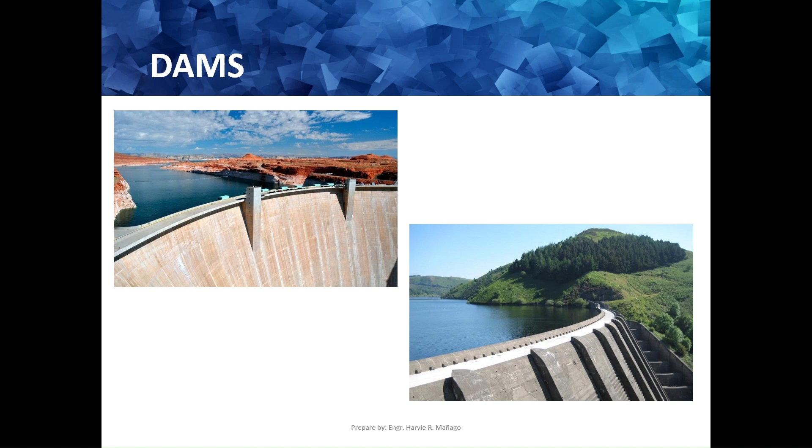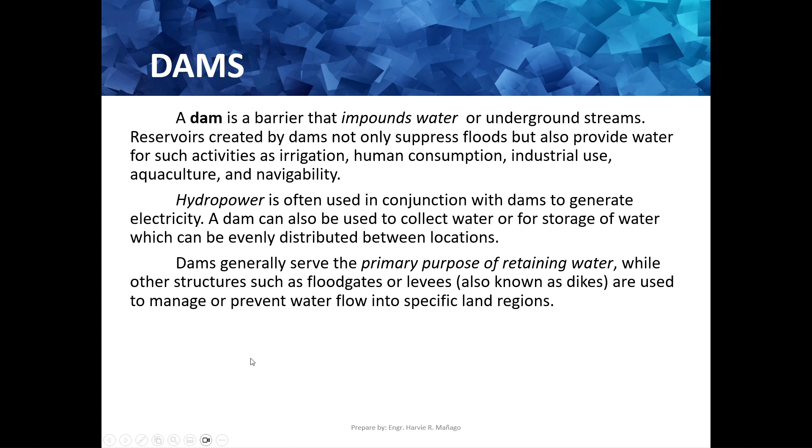Our next discussion is the application of hydrostatic forces on dams. We'll still be applying what we learned about hydrostatic forces on both plane and curved surfaces to dams. So basically, what is a dam? A dam is a barrier that impounds water or underground streams. Reservoirs created by dams not only suppress floods but also provide water for activities such as irrigation, human consumption, industrial use, etc. Sometimes hydropower plants are incorporated into dams to utilize this function. But basically, the general purpose of a dam is to retain water.

Hydrostatic forces acting on a dam can cause certain types of failure. One is that the dam may slide horizontally along its base, meaning it gets displaced horizontally. Or it's possible that it may overturn, meaning it tips over or tumbles along its toe.

So what is this 'toe' that was mentioned? We'll show this later in the sample problem. Another consideration is hydrostatic uplift along the bottom of the dam, caused by water seeping under the dam. Since the dam is submerged, like any other object underneath the surface of water, it has a buoyant force, so we get an uplift force along the bottom of the dam. That's another thing to consider.

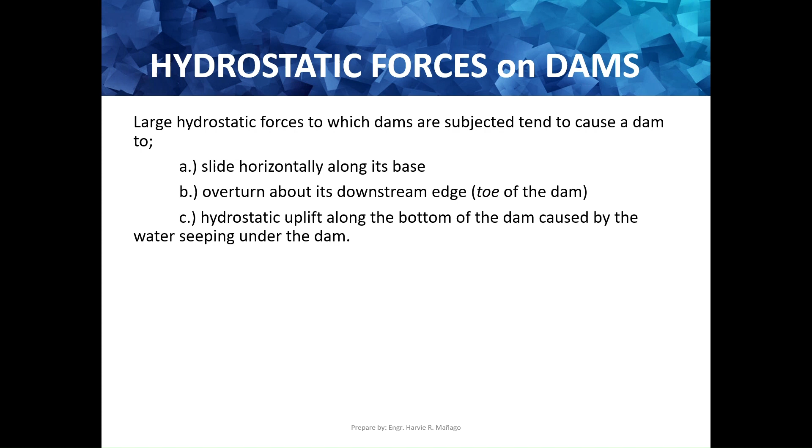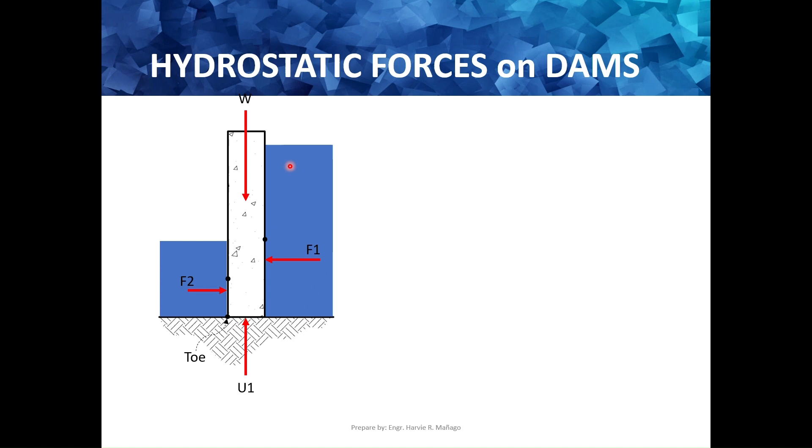Later we'll have a sample problem so this is better understood. Here are the formulas we need to consider. The factor of safety, Fs, for overturning is calculated as the total righting moment divided by the total overturning moment, and this should be greater than 1. That makes sense, because the righting moment, or the moment that prevents the dam from overturning, should be greater compared to the total overturning moment, or the moment that causes your dam to overturn.

So, sa sample problem, papakita natin kung paano yan.

Another formula naman is the factor of safety for sliding. Take note, Fs yan yung factor of safety. So the factor of safety for sliding, ito naman yung formula: sliding resistance divided by the sliding force. Mapapansin niyo, kamukha lang ito nung sa MECDEF ninyo, yung topic ng friction. So basically ito yung friction force mu ry divided by the sliding force rx.

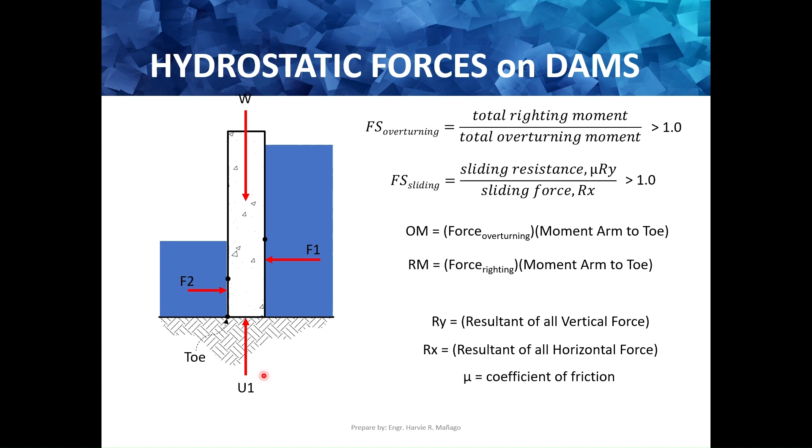Okay, so set natin itong figure na to para mas makita natin yung mga possible forces na mag-aact on your dam. Dito simple lang, rectangular lang siya, straight lang, okay? Tapos may hydrostatic force ka lang dito, and then you have the weight, and then yung uplift force. What if ganito na yung itsura ng dam mo? The easiest way is gawin natin siya by parts. Hati-hatiin muna natin, para kapag kumukuha tayo ng volume, kumukuha tayo ng area, hindi tayo mahihirapan.

Kanina kasi trapezoid medyo hassle. Maliban pa doon, sabi nga natin, kailangan nating mag-moment. At kung iisipin natin, actually kaya naman natin makuha yung area ng trapezoid. Ang kaso nga lang, kung you are going to take the moment of the weight of the concrete, kailangan mo pang kunin yung centroid ng trapezoid, which is medyo hassle, medyo hahaba yung solution mo. So the easiest way is to cut it dun sa mga simpler figures.

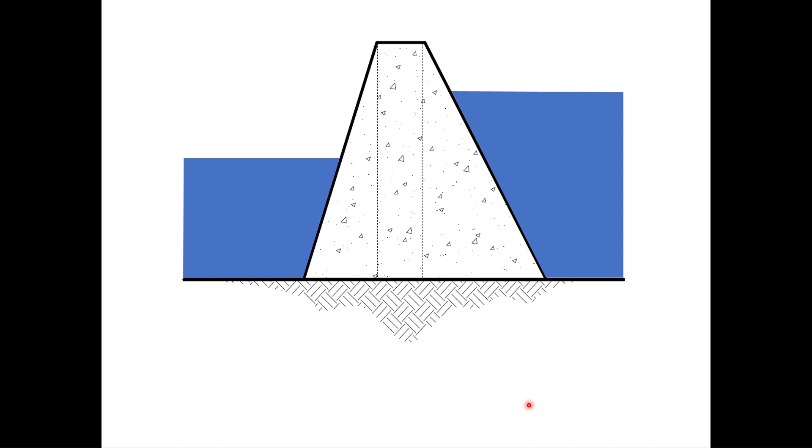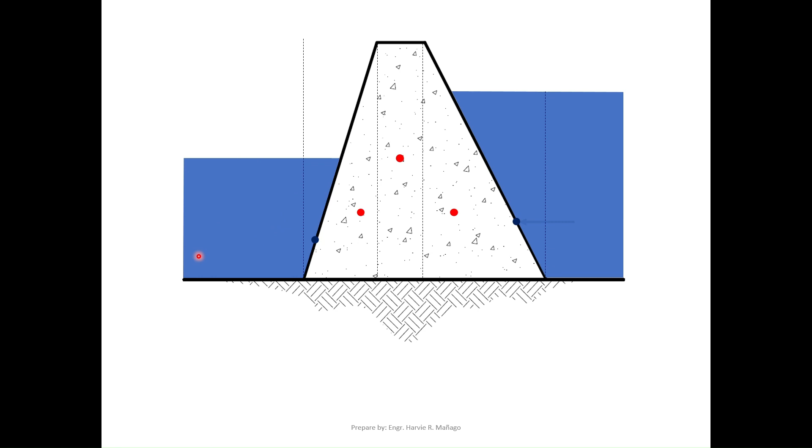At saka, pakita natin yung mga forces. Okay, so ayan na, we have our weights here, at ito yung mga hydrostatic force natin. At dito sa baba, since meron tayong liquid on both sides, magkakaroon ka ng gradient dito sa ilalim. Yung gradient na ito, yan yung uplift force diagram mo. Ulitin ko, yan yung uplift force diagram. So paano makukuha itong diagram? Mamaya sa sample problem papakita natin. Pero for now, pakita lang natin yung mga forces.

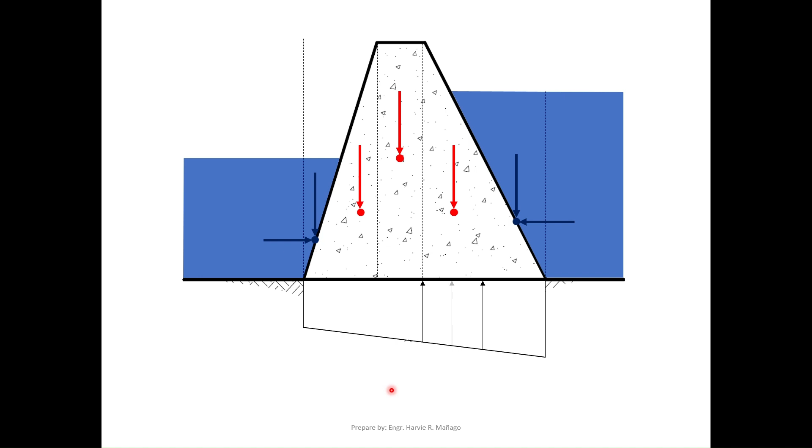So dito, ayan yung uplift force diagram mo. Since trapezoidal pa rin yan, pwede mo pa rin hatiin. Pwedeng isang rectangle, dito mo hatiin. Ayan, dito ganyan, rectangle and triangle. Or ganito, katulad na itong nasa figure na, ayan, yan yung pagkakahati niya, dalawang triangle. Possible din naman yan, okay?

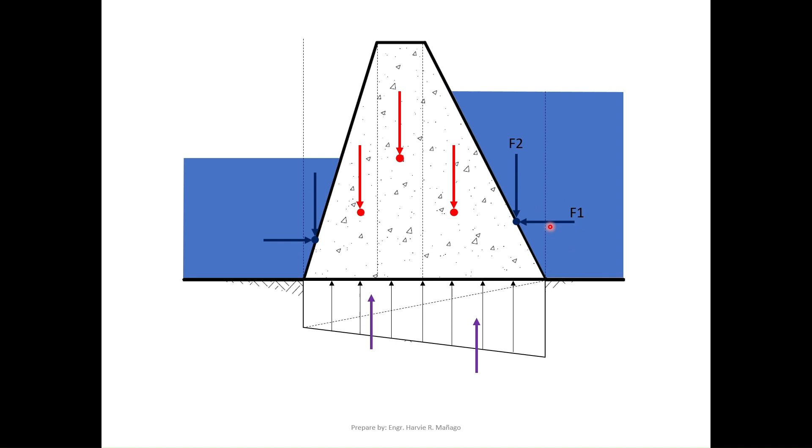And then lagay natin yung mga forces natin. So here we have F1 and F2, yung hydrostatic force mo on the right side. And then we have here yung sa left naman yung F3 and F4. Okay? And then we have the weights W1, W2, and W3.

And then yung uplift force natin, if you are going to take the area of this diagram, yan yung U2. And then if you are going to take yung area naman ng diagram na to, yun yung U1. So yung designation is not that important, importante lang sila para lang hindi tayo malito. Mamaya papakita natin sa sample problems kung paano natin gagawin yung mga sample na medyo komplikado or medyo marami na yung mga forces na lumilitaw.

Take note ito, yung toe natin, ayan. So dapat, again, aalamin natin kung nasaan yung toe, at ano nga yung palatandaan natin? Dapat malayo siya doon sa mataas na tubig. Because ang tendency sa figure na ito, since mas mataas yung tubig dito sa kanan, ang direction ng overturning natin is to the left or counterclockwise. Alright? So lagi nyo tatandaan, the location of the toe, ayan, dapat mas malayo siya doon sa mataas na tubig.

Okay? And then dapat yung mga forces natin ay imo-moment natin dyan. So dapat iti-take natin yung mga moment arm towards doon sa toe natin. So ayan yung mga moment arm natin. Ito, ayun, ito, ayun, at saka yun. Okay?

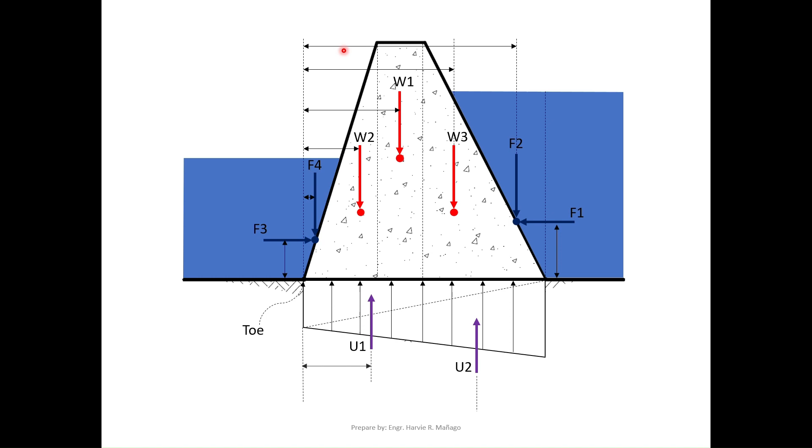And then ayun, sa U1 and then sa U2. μRy, ito, mga moment arm pa rin ito, Y1 and Y3. And then X1, X2, X3, and then M1, M2. So these are all moment arms towards dun sa toe natin. Alright, so kailangan nyo lang tandaan or pansinin dito sa figure na to is yung direction ng moment arms natin. Lahat sila papunta sa toe natin. Alright? Yan, so yun yung kailangan nyo tandaan.

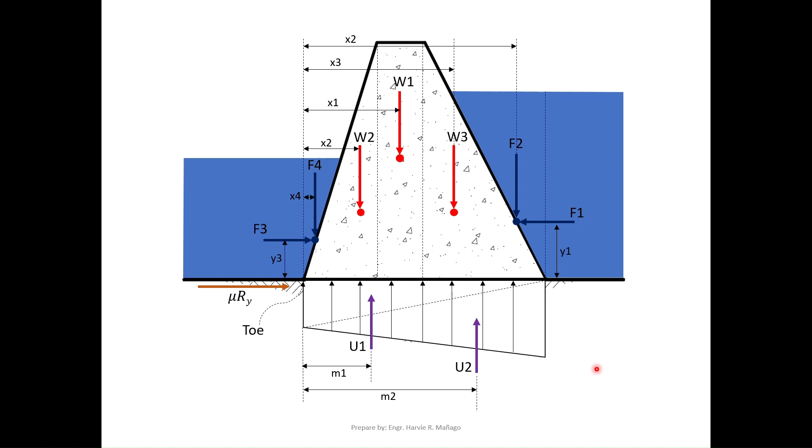Sample problem tayo para mas maintindihan natin. So, calculate the factor of safety for overturning and sliding for the dam shown in the figure per linear meter. Unit weight of concrete is equal to 23.5 kN per cubic meter and the coefficient of friction is 0.6. So sabi ko nga, itong part na to laging given yan sa problem, or most of the time, if not always, given yung 0.6 na, ay yung coefficient of friction natin. Okay, so sige, umpisahan natin.

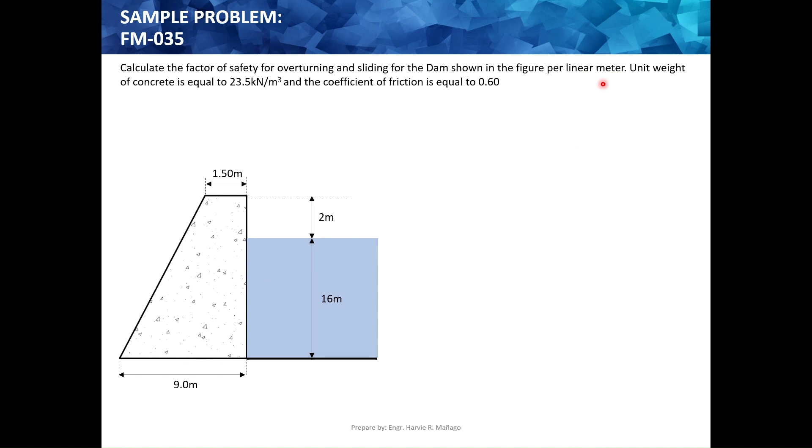So pansinin nyo dito, sabi niya, per linear meter. Ayan, ayan yung sabi niya, per linear meter. So ibig sabihin, we are going to consider na yung width natin on the z-axis, dun sa kung titignan nyo ng 3D, on the z-axis, ang i-consider natin na width is 1 meter. Okay? And then again, sabi ko nga, ang pinakamadaling gawin dyan, hati-hatiin nyo muna para hindi komplikado kapag kumukuha tayo ng centroid or kapag kumukuha tayo ng moment arm.

So hatiin natin dito para magkaroon tayo ng isang rectangle and isang triangle. So we have to consider yung area na to, at saka yung volume na to, at saka yung volume na ito, at saka yung hydrostatic force natin. So nilagay ko dito yung hydrostatic force, yung diagram ng hydrostatic force natin, o yung diagram ng hydrostatic pressure na katulad nga ng pinag-usapan natin last time dun sa discussion natin na yung if rectangular lang yan, so lilitaw na 1 degree of sloping lang yung ano natin, yung diagram natin. So lilitaw magkakaroon tayo ng triangle dito.

Okay? So set natin yung mga forces. Ayan, ito yung pinakamadaling gawin dyan. So kapag hinati mo yung mga figures mo, nailagay mo na yung kung saan mo siya hatiin. Okay? I-set mo muna lahat, i-drawing mo muna lahat ng mga forces mo, lahat ng possible forces mo. So dito, we have to take yung weight ng concrete, so magkakaroon tayo ng W1 and then magkakaroon tayo ng W2.

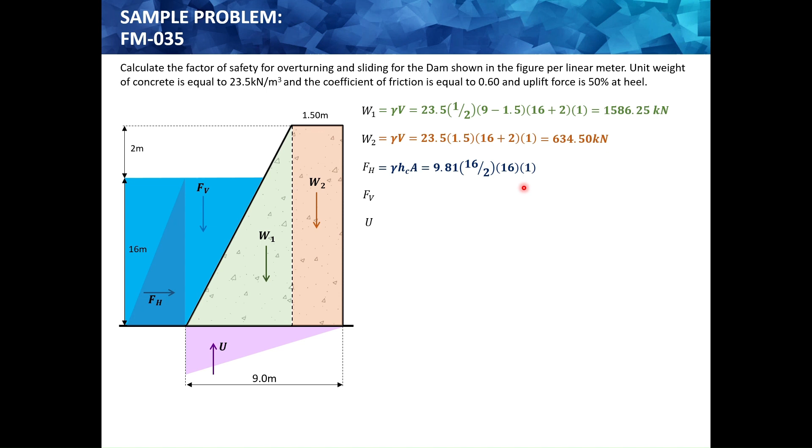The unit weight is 9.81. For HC, since we're only looking at the horizontal projection, it's still rectangular, so the centroid is still 16/2. Multiply it by the area of the projection - that would be 16, the height, multiplied by the width of 1.

So the total hydrostatic force horizontal is 1255.68 kilonewton.

Before we proceed to the hydrostatic force vertical, we have to take the volume of this part. So I need to get the area first before getting the volume. To get this area, the height is already known, that's 16. But the base is not yet known. We only know that from here to there, that would be 9 minus 1.5, or 7.5 for this part. But this is not 7.5 either.

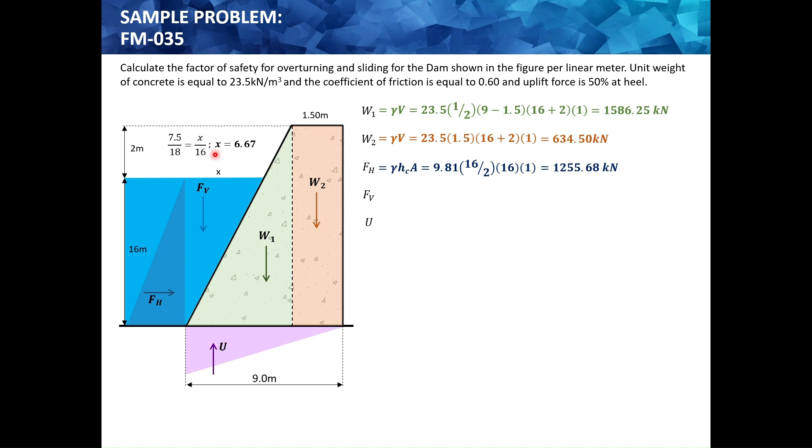7.5 is to, how much? 16 plus 2, 18. So 7.5 is to 18. And we are going to determine the x. X is to, how much? 16. So 7.5 is to 18, x is to 16. Then just cross-multiply that to get the value of x. X is equal to 6.67.

So once we get 6.67, we can now proceed to our FV. So that's just unit weight multiplied by the volume. The unit weight, not concrete anymore of course. What unit weight will we use? Since this is water, we will use 9.81. And then we take this volume.

So to get that volume, that is triangular, so 1/2 base times height. So 1/2, the base we got, which is 6.67, multiplied by the height of 16. So this is the area. To get the volume, multiply further by the width of 1. So, 523.4616 kilonewton.

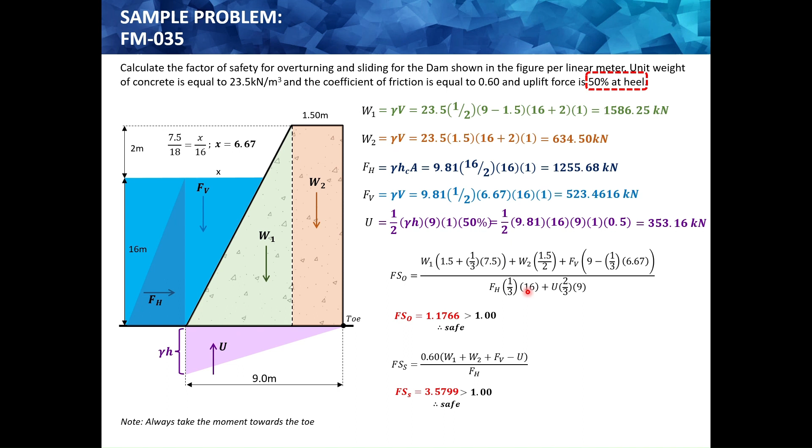So, that's it for the dams and probably next meeting dun sa face-to-face class natin, isolve natin ito.